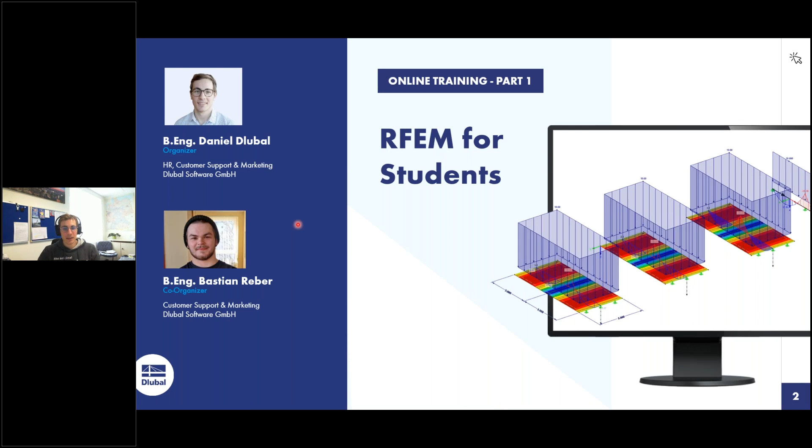Now let's go ahead. For those who are using the GoToWebinar platform for the first time, I would show you the general concept. First of all, if you use the desktop application, it can look like that. Show or hide control panel. When someone can't listen or hear us, just adjust your audio settings, maybe change your speakers, and then you can hear us. And if you have any questions, put that in the box, and Bastian or me will answer it.

So what is the content of today? First of all, I will explain the principal theory of the finite element analysis, or finite element method. Don't be afraid, I don't make any lectures like in the study, just 2 slides of very basic theory of finite element method. Then I will introduce you to RFEM, explaining the general user interface, the general concept, the general functions, where you can find what, and so on.

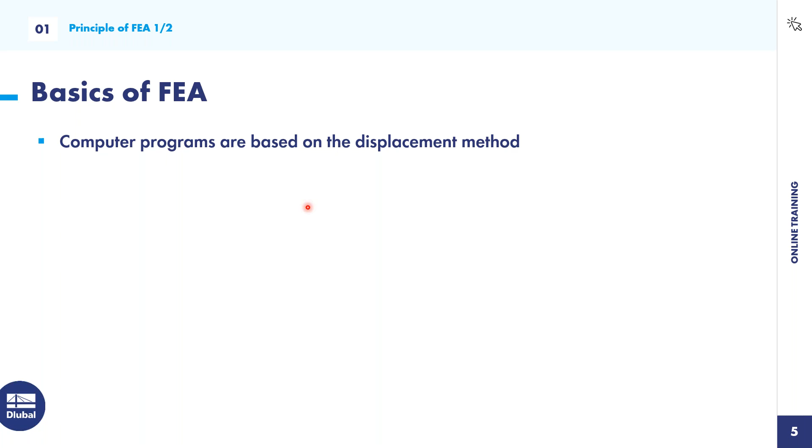But computer programs use the displacement method because it's easier to implement, more convenient, and easier for calculation in the programs. So if you look at any complex structures, it's normal that the analytical solution isn't so easy - it's hardly possible to calculate or find an analytical solution.

This is also the reason why real structures are decomposed into a mesh of finite interconnected elements. At each element continuum and at each node, the properties - especially the degrees of freedom like deformation or restraints - are described at the nodes, so the properties of the element continuum.

Normally the finite element analysis is just a numerical approximation of an exact solution, so the mechanical behavior is described by approximation sets. The whole process of decomposing a structure into finite elements is called discretization - remember that, this is very important. Discretization is the decomposition of structure into finite elements.

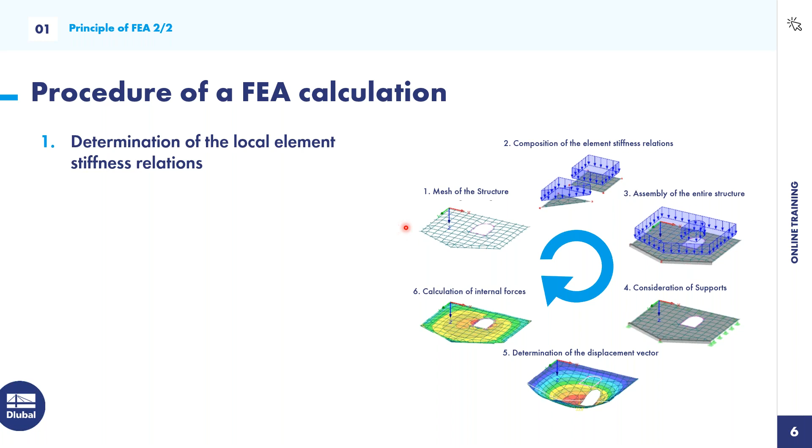So what is the general procedure of an FEA calculation? On the right side you can see this image with the basic steps. First of all, what we do is the discretization - we determine the local stiffness relations, the local element stiffness matrix at each node. So we mesh the structure, we do the discretization. Then we transform it to the global coordinate system and assemble the whole entire structure.

Then we also have to consider different supports in order that the structure is stable. So the boundary conditions are very important to define, and normally the boundary conditions are the support conditions.

And then, as we said before, the displacement method is the method implemented in computer programs. So first we determine the displacement vector, and after that the internal forces like bending moment, shear forces, normal forces, tensions, stresses, strains and so on. This is also called the solution of the equation system, and then we do the determination of support forces and internal forces. So this is the general and very short concept of FEA calculation.

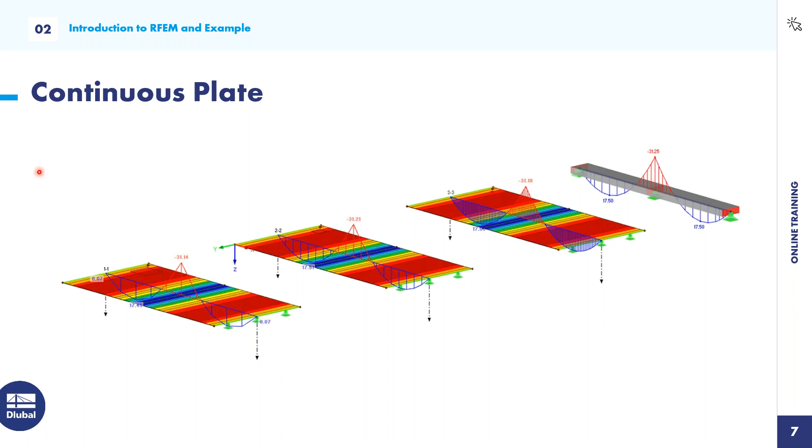So let's start with RFEM. I have also prepared one question for you because I want to know how good your knowledge is in using RFEM.

Okay, most of you have finished this poll, so I will show you the results. Most of you, the participants today, are beginners - perfect. And some others have already some experience in using RFEM, also fine, because for them you can learn maybe some functions you haven't heard about before. So I think for everybody there's something new to learn here in RFEM. Let's go ahead.

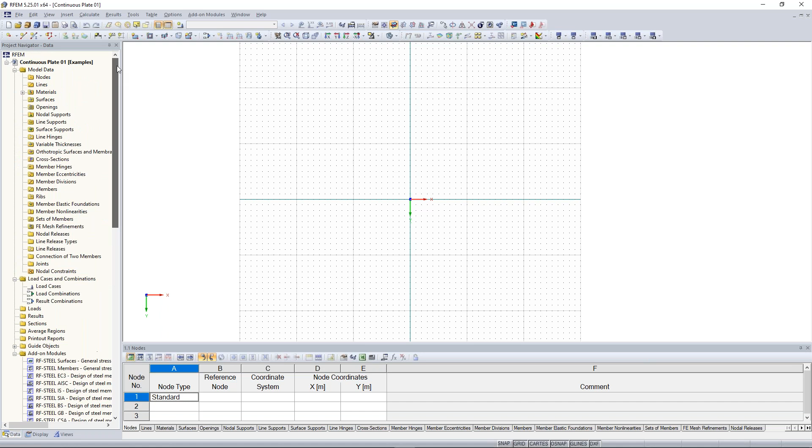Good. So I will explain now the whole user interface of RFEM. You don't have to do it now with me because I will open another project where I can explain the whole user interface using an already existing project. So just watch and remark maybe some information.

So I will open this one. Fine, very good. I will activate here in the status bar the snap and grid function.

So chronologically, the first step is that we have here the menu bar, and here we have the possibility to do almost every kind of workflow function of RFEM. The basic file options: you can save, open, import, export, insert blocks, save it in the project manager, print, and so on. I think this is known from other software applications.

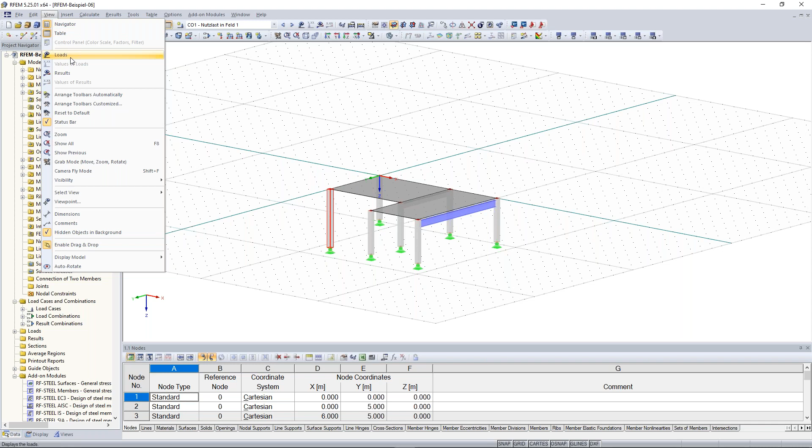Also, you find here additional information concerning the model data, loads, load cases, and combinations. In the view, you can click here on loads, then the loads will appear, or clicking on the results—since we don't have any results at the moment, the program asks me if I want the results, and I click yes. Now I see also the results, and also some other kind of things like comments, dimensions, and so on.

So insert, with this tab you can insert almost every object, from model data to loads and also to load cases and combinations.

The general step in RFEM is that first you model all kinds of necessary objects. You define materials, cross sections, and then you can also model members, hinges, and finally nodal supports. Then you create your load cases and combinations, then your loads, and then you can calculate it. Afterwards you have the possibility to watch the internal forces and the results. This is the basic workflow in RFEM for calculating projects or doing structural analysis.

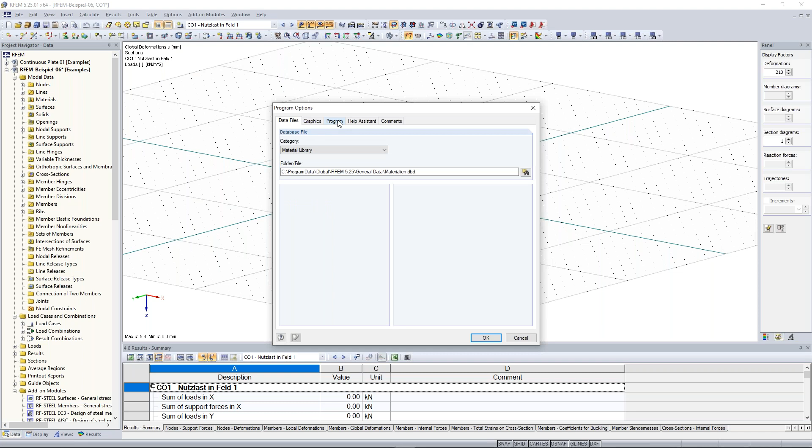The options in the menu bar let you change the language. Especially for those from Italy, France, Spain or similar, we have the possibility to change the language into, I think, 10 or 11 languages. The whole interface will change after you quit and reopen the program, so you restart it. We offer Italian, Polish, French, and other languages like that. You may also see in the background I'm using a white background here.

For those opening RFEM for the first time, you can change your background. In the options, in the configuration manager, you can change the background to black or white. At the moment I use the white background, but when I double click on black background, it changes to black. You can also adjust a green or red background. Just use the display properties or other colors, and you can adapt your background.

I think that's everything for the menu bar. Under the menu bar we find the symbol bar.

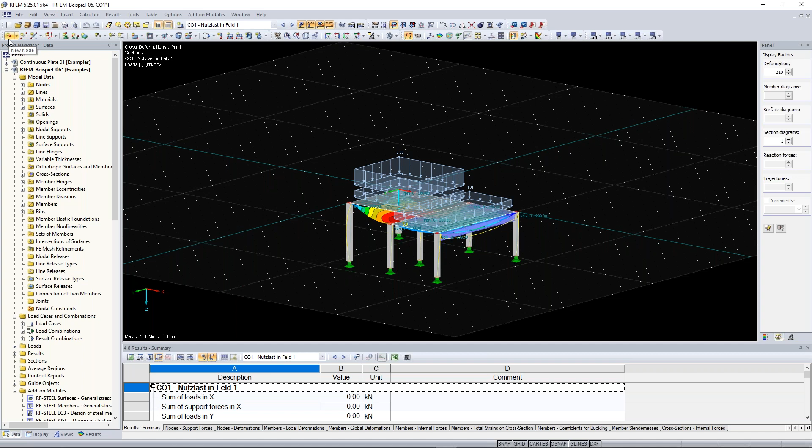The symbols enable a fast way of inserting objects, views, or edits. So if I want to create a new node, I click on new node and click somewhere, and I get a new node. The same goes for lines, for example - I click here and then here. I think this is pretty clear.

Now I will undo it, and I will also change my background again to a white background.

On the left side, you also find the project navigator. It is divided into four registers: data navigator, display navigator, view navigator, and results navigator.

In the first one, the data navigator, you find all kinds of objects, beginning from model data, continuing to the load cases, the loads, results, and so on. You can create new objects, for example by right-clicking on a node and selecting edit node or new node. But of course you can also find all existing objects - when I open this tree structure, I see the already created nodes, like this one.

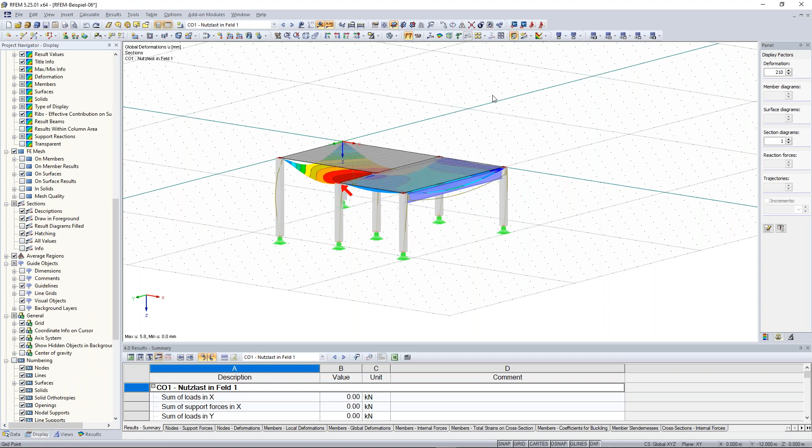You can also hide some kinds of models, like for example the nodal supports - just click on nodal supports, and the supports disappear, but only in visibility. The same applies here with the results and FE mesh - when I don't want to see the FE mesh at the moment, I click on that and it disappears.

So far to the display navigator. Let's continue with the view navigator. So if you like a certain view, for example this one, yeah, quite nice, then you can create a user-defined view. Just click here on create new user-defined view, favorite.

When you rotate it a little bit or move away from the model and want your favorite view again, just click on favorite and it jumps back to your favorite view. This is a big advantage, especially when doing more detailed or complex structures or projects. Then you can use these user-defined views.

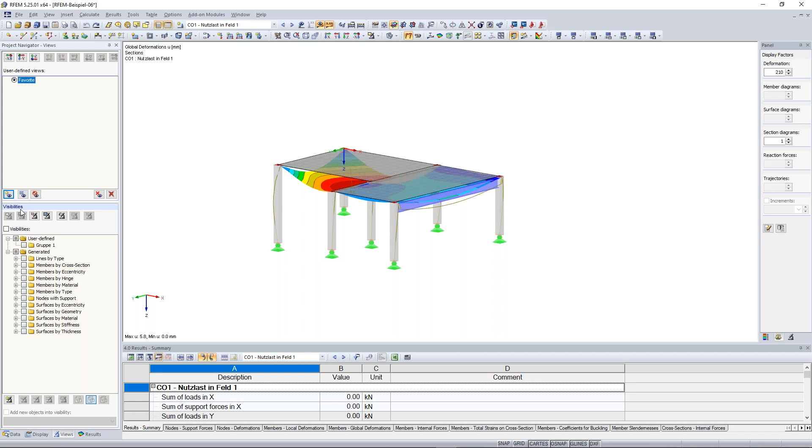Also with the help of visibilities, you can filter some things better. For example, I just want to see all cross sections here of this concrete. No problem. Go to members by cross section, open this tree and activate the rectangle 300 by 300. Only that kind of cross section is visible and also possible to modify.

You can also right click and this menu appears, and then click here on display model, show hidden objects in the background, so the surfaces here will disappear and it will look like that.

To undo this visibility mode, you can click here, visibility by selected objects, click on the arrow, and then cancel visibility mode. You can also do the same thing here.

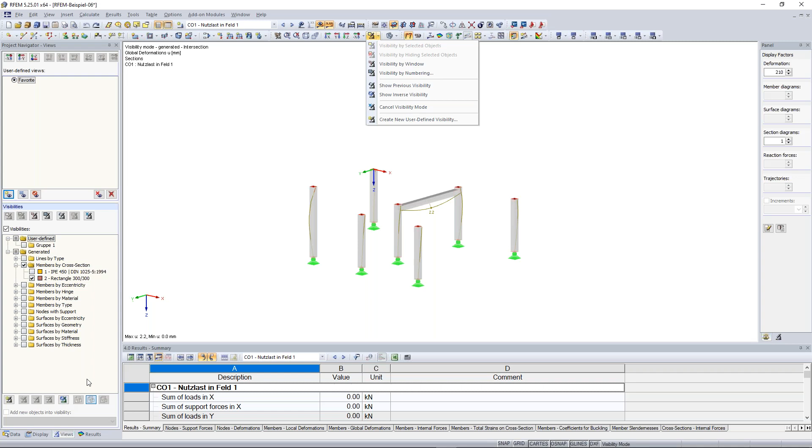Now the last navigator, this is the result navigator. Here I can see results like deformations, stresses, internal forces of members, and also the support reactions. At the moment I see the global deformation of the whole structure, also from the members and from the surfaces.

If I just want to take a look at the members, I click here on members and choose the right internal force. In this case I choose the normal force. And there I can see the compression forces in the concrete columns.

Also here surfaces, internal forces of the surface, mx, my, and so on. And also the support reactions with the components px, py, pz, and so on.

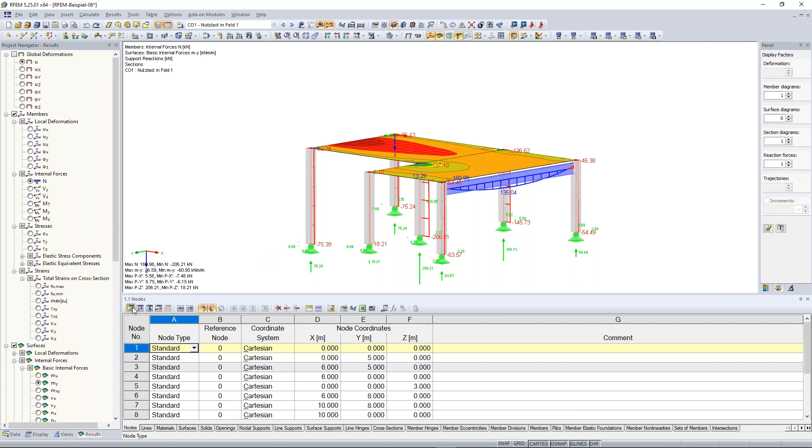So much to the navigator. Now, on the bottom of our user interface, we have also the tables. With the tables, we have the possibility to view all information and also to insert and create new information or objects. For example, I can create here a new node.

So I click here on standard. Reference node is my node here, and I enter the coordinates. I click here, x is 14, y is 0, and z is 3. And I see here this created node.

This is also possible for almost all other kinds of objects like lines, materials, surfaces, solids, and so on. You can jump to the next tables by clicking the next icons. Now I am at the load cases, nodal loads, or also member loads, line loads, surface loads, results, and so on.

Now maybe to the movement of the RFEM model. With the middle mouse wheel, you can move your whole project.

By clicking the left mouse button, you can create a selection window. When you do it from the left corner to the right corner, you select everything which is completely inside this selection window. So in this case it would be the whole right column with the nodal support and also the node on the top.

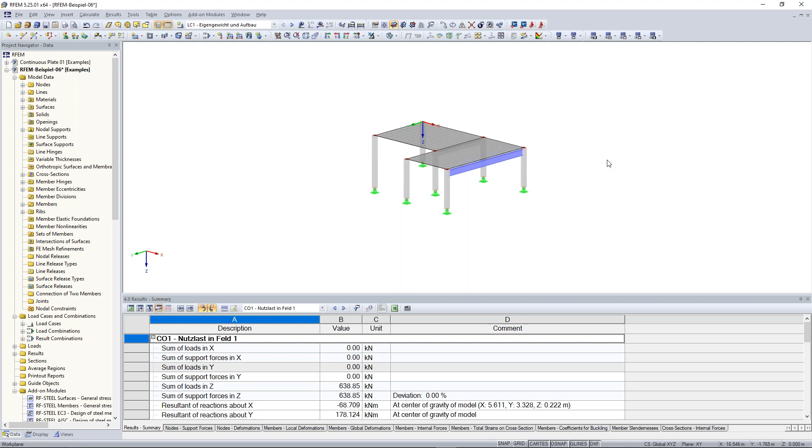And with the mouse wheel you can also zoom in and zoom out, I think this is clear. When you press the control key on your keyboard and also press the mouse wheel, then you can rotate this structure. And when you press the shift key and also the mouse wheel, then you can zoom in, zoom out.

We offer the same possibilities also with this icon here in the icon bar: move, zoom, rotate, and so on. There you have the same possibilities, and so on. Good, I think this was everything.

Bastian, have I forgotten something or do you want to add something? I think you haven't forgotten something, and there are also no questions. So I think you can move on.

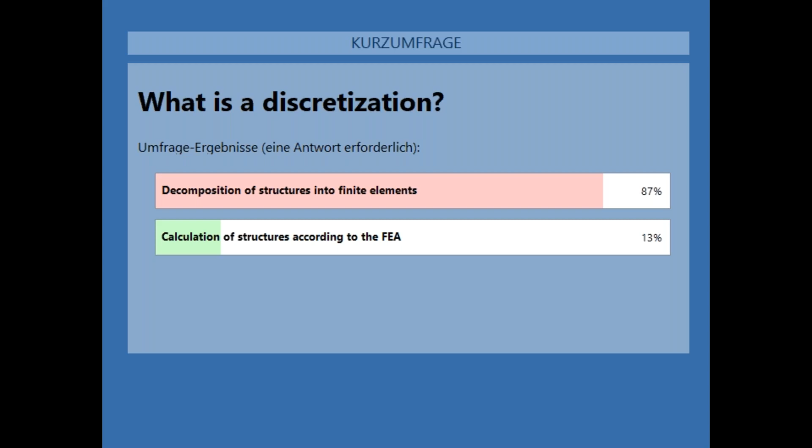Very, very good. So let's start our example. Jump back to the continuous plate, let's start modeling it.

First of all, I create a new surface. In the symbol bar I find this icon, new rectangular surface. By clicking on the arrow, I find also other kinds of surfaces, but for me it's good to use this rectangle one. I click on that, a new window opens, and the next thing I'm going to do is create the material.

In this case I use the Euro concrete C30/37 material. For those who don't have this material here, no problem - edit the material by clicking this icon here, and open the material library.

There I have the possibility to filter different kinds of materials like concrete, metal, timber, and so on, and also the material category itself, like concrete and lightweight concrete, and also define it according to the standard. In this case I choose the Eurocode, because in Germany we use the Eurocode. Maybe when we have some people from Swiss, Chinese, Great Britain, Canada, and so on, there are also some other standards.

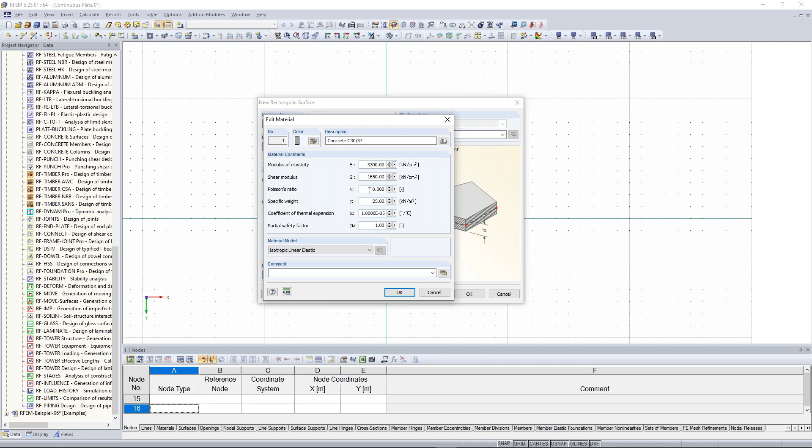I click on OK. Important note is that we set the Poisson's ratio to 0, because we want to get for that example results which should be constant over the whole plate thickness - so no shear deformation in the plate thickness. I click on OK.

And the thickness of our concrete surface is 300 millimeters. So I click on OK.

Now I draw and activate here the snap function. Now I draw this rectangle from my local global coordinate system, 10 meters to the right side and 5 meters high. Good, now right click and I close this way of inserting a new surface. So now I see here the rectangular surface.

And now I can copy it, or I create a new one. Now one tip, please remember this, it helps me a lot: by clicking the enter or return key on your keyboard, you do the same task again. So our task was the creation of this new rectangular surface. When I click the return key or enter key, it will open this new rectangular surface window again, and I click OK again, and I create the same surface again with the same geometry.

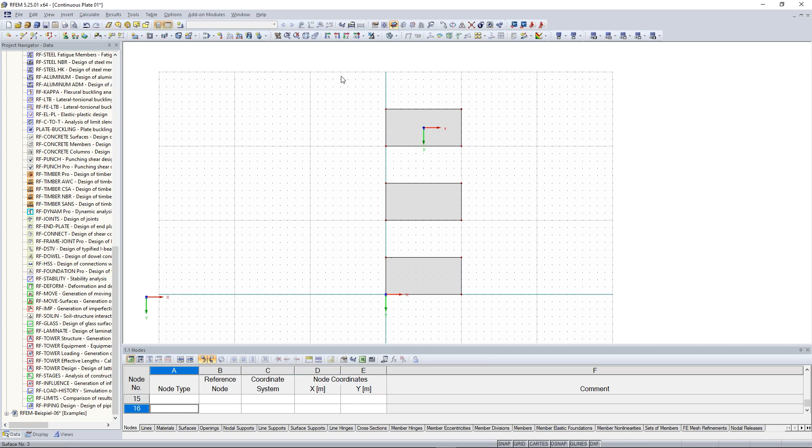And now I do it here again, in a distance of 5 meters from the right upper corner node. So now we move this 10 meters downwards. So I select all 3 plates, snap here in the near of this middle surface, in the near of the left bottom corner, and move this to my global coordinate system.

And I click here the import parametric solid cross section, a rectangle. The width of my cross section is 1000 millimeters, and the height is the same as the thickness of my plate, 300 millimeters. The material is the same, concrete C30/37.

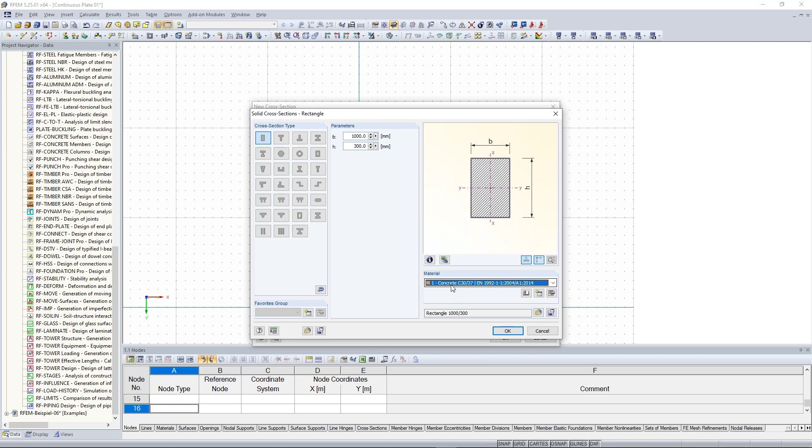I click on OK, and it looks like that. Here I get the cross-section description, also with the cross-section properties, like the moments of inertia, bending, torsion, and so on. I click on OK.

And now the member start has the cross-section of this one, and the member end also has the same. I click on OK. And now I draw it from left to right, also 10 meters long, and close it with a right click.

Good. Now I can rotate it a little bit, and now I can see it from a 3D perspective.

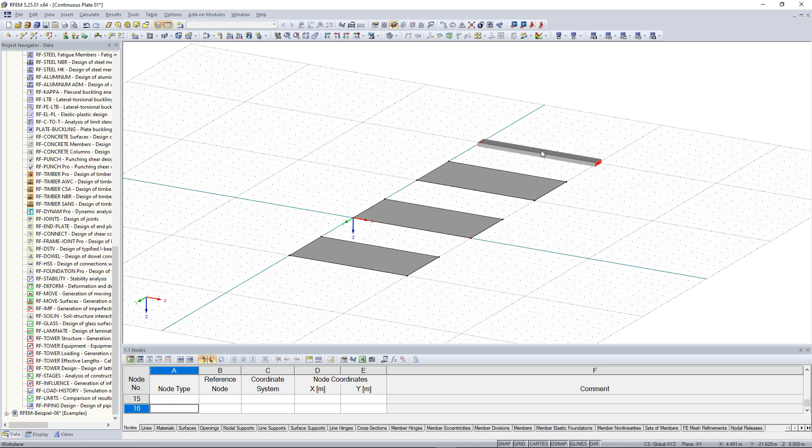So the next thing is we want to have a continuous beam and also continuous plate. Therefore, I have to create lines in the middle and also nodes here in order to create supports afterwards. How can we do that? We can divide this line into 2 lines, and then we get the middle node. Then, with the reference of the middle node, we can create the next line perpendicular to the other end.

So you can also see here the line, the red line, and also the arrow. The arrow shows from the left to the right side, and this symbolizes that the starting node is on the left side and the end node is on the right side.

With a right click on one of the line nodes, I can also show the local axis system, and this is similar to the line direction. So the local x-axis of every line or every member is the same as the line direction. You see it shows to the right, the same direction. And one important note is also that...

Every member has an included line, but not every line has an included member. For this case, for example, I have this member, and here I have included this line. So here I have this member and also the line, but not every line has a member. I think this is clear because here in this case I have this surface, and these lines are just the boundary lines for this surface.

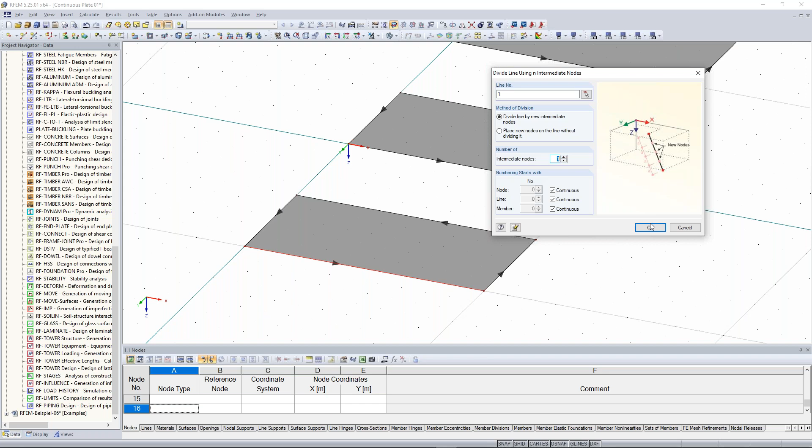So I click here on 1, and I see this node, and these 2 lines are divided. Next thing is that we create this line perpendicular to the next one. So click here on new line and draw this line from there to there. Double right click and we can close this.

Now it comes to my favorite way of creating objects, and this is the copy via drag and drop. We can easily copy this line by drag and drop. Just click on that line, press the Control key on your keyboard, and now the left mouse, click and hold and put it to the other surface. And the same thing we do also for the other one.

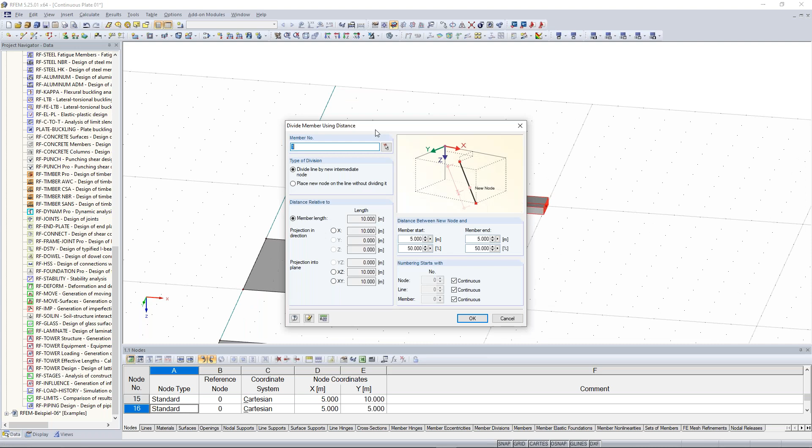Good, now let's divide this member here. Press right click, divide member. Now you can do it by distance or graphically. I decide to do it by distance. And now it's also interesting how we can do that. We want to divide it exactly in the middle, so we can choose here 50% as relation or the absolute value. And it will start from the member start or from the member end.

Now here you can see the arrow, and this arrow shows from the left to the right side. When I want to have a division 3 meters from the start, I have to enter 3 meters, and the member end will be calculated automatically. The same thing with member end: if I want to go from the right side, so from the member end, press 6 meters, the member start will be resulted automatically. But in our case, 50%, because we want to divide it exactly in the middle. I click OK, and we get this new node.

Okay, Bastian, are there any questions? I see some questions in the chat. So should we show something again? What do you think?

I think what you can do is show us again how you can edit the cross section, for example, of the beam, and yeah, guess that would be nice to see again.

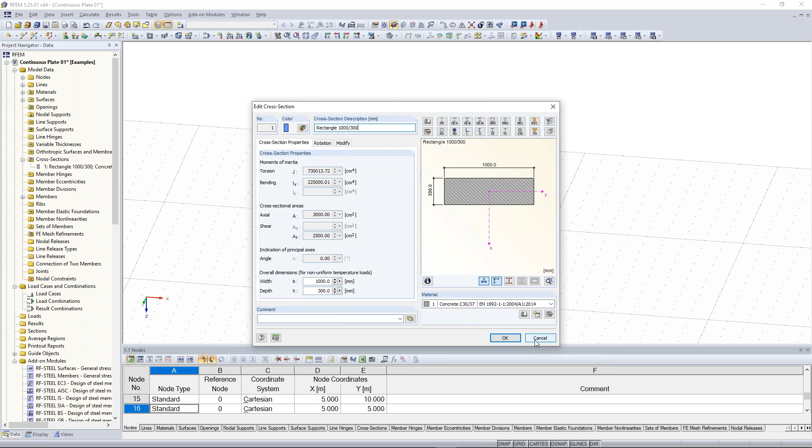This is one way of doing this. Or you choose the whole member by selecting it, right click, member, and edit. Then you can modify your member by editing the cross section for the member start, or create a new one. It's the same procedure as with the data navigator.

Good, I would continue. Now let's do some supports. It's very easy. We have line supports for surfaces and lines, and also nodal supports like for this kind of members. So we create line supports. We choose this hinged support, click OK.

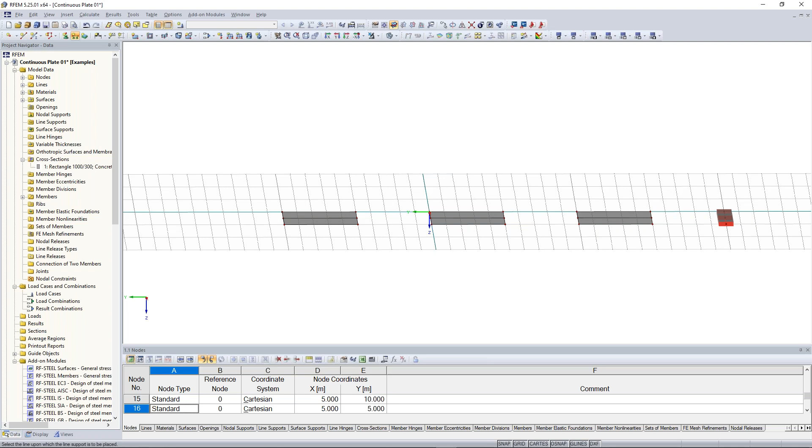Now I draw, and this is the big advantage of RFEM: I can choose and select several objects at once. So I rotate my interface a little bit, and now I draw a selection window from the right to the left side in order to get all three middle lines here. I do the same thing with the other surfaces.

Good, now let's come to the member. Here we do two different kinds of nodal supports. The first one is a new type of nodal support, so I click on new type of nodal support. Now let's look at this definition of support conditions.

So if I activate or check one condition, like UZ, then I deactivate the deformation of UZ, so no deformation in this direction is possible. Therefore there will be some forces, and the same also with restraints.

So the same also with, now I have to look it up, this word, for twisting and also for moments. In order to prevent torsion or the twisting of my member, I also have to activate the restraint phi x. This will prevent torsion around the x-axis.

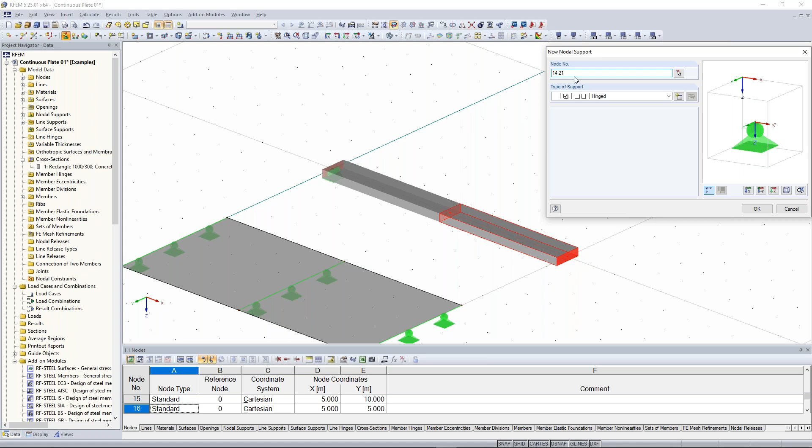Click here on New Nodal Support, and now we can choose the normal hinged support. Because we have already selected the nodes, they appear here also in this box. Click on OK, and the two supports were created. Okay, good.

Now the next step is the creation of loads. Before we add loads, we have to create load cases. Click on New Load Case in the symbol bar, or here under load cases, combinations, New Load Case. Same procedure - as you can see, we have more possibilities to insert or create something. So, New Load Case. For our simple example, we insert the name or description 'test load'.

And deactivate the self-weight, in order to compare the results better. Then I click on OK.

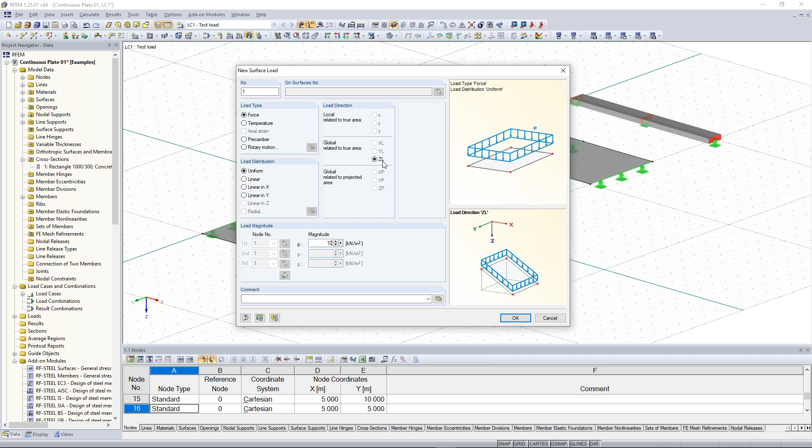I will create surface loads and member loads. So again, new surface load here in the symbol bar. Here I can set up load types, load direction, uniform distribution, linear in X, linear in Y, and so on. I add the magnitude of 10 kilonewton per square meter. Maybe the load direction is closed or greyed out, so greyed, because we use model type 2D, so there we have some restrictions concerning the load direction.

I click on OK, and I add the loads on the surfaces. Good, and now let's do the same for the continuous member. One big mistake, especially for RFEM beginners, is to use line loads for members, but we have to use member loads for members.

Line loads are used for additional loads on lines. So when I have, now I have to look up the word, a railing or handrail on this line, and I want to add some loads, then I can use the line load. Or when I want to consider wind loads at lines, then I can use line loads. But when I really want to load members, I have to use the member load. Please keep that in mind.

For members I use member loads. So I click on member loads, enter the same load parameter, 10 kilonewton per meter, click on OK, and I choose both members.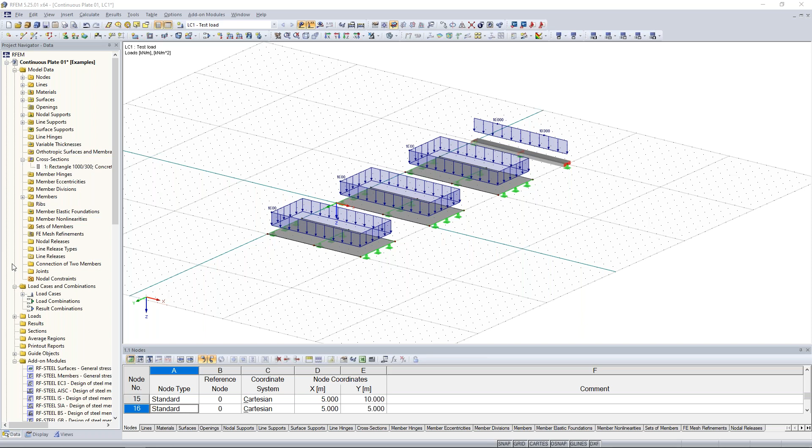Nice. So the next part is the creation of the refinement, so every surface gets a different mesh size. In order to do that, I create here FE mesh refinements. Normally, the whole settings of the FE meshes are managed here at the Calculate tab under FE mesh settings.

Here you set the general target length of the finite elements. So if I would do nothing, every surface would get a finite element length of 0.5 meter. But in this case, I want to have for every surface another one.

So I do here FE mesh refinement, right click, new FE mesh refinement. I choose here at first surface, target FE length 1 meter, so we get 1 meter big meshes. And now I have to choose the surface, and in this case, I choose the first surface. I click on OK, and click on OK again.

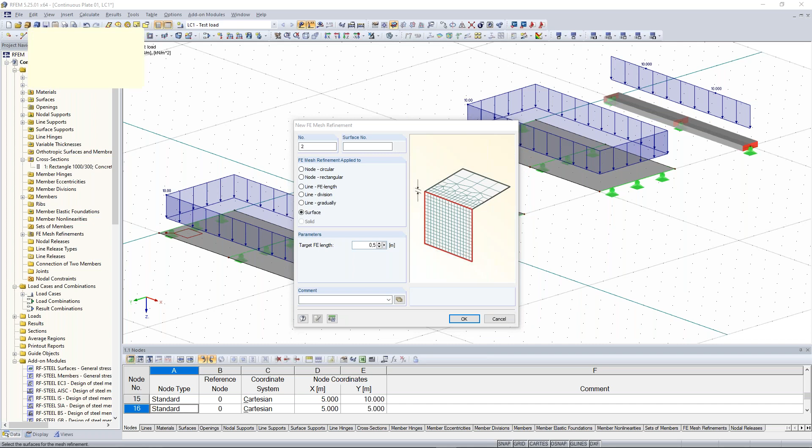Now let's do the same thing again. Right click here in the data navigator, new FE mesh refinement, 0.5 here at the target FE length. And the surface is this one. I click on OK, on OK again.

And now here we do a different way of insert. Right click, FE mesh refinement, new. Because we have already selected it, it shows me here that we have this third surface. We create a new FE mesh refinement, 0.1. Here we see the FE mesh refinement with this quadratic object symbol.

And now I would suppose that we calculate it. Before we do it, and in order to compare the results better to each other, it would be quite helpful if we have sections here at the surfaces. In order to do that, here in the data navigator, we have also the possibility to create sections.

Just right click, new section. The section name is 1-1 or something like that. You can also do A, or whatever, it's up to you. The sectional surface, so the projection direction is here, the global z-axis. I think local and plus z is okay, but please only on surface 1.

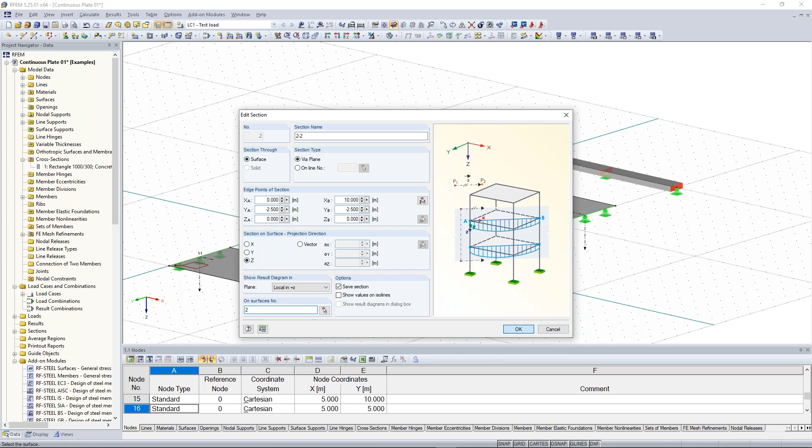So, modify or edit here the section name and choose here the correct surface. And let's do this thing again. Choose here also the correct surface and click on OK.

Good, now I think we have everything we need for our calculation. The next thing is starting the calculation. Therefore, you can use here calculate all in the symbol bar, or also calculate RFEM results only, or just calculate, and there you can choose your load case or your load combinations and so on.

The topic of defining load combinations and so on will be part of the next chapters, the next parts of our student series of online training. So I click here on calculate all.

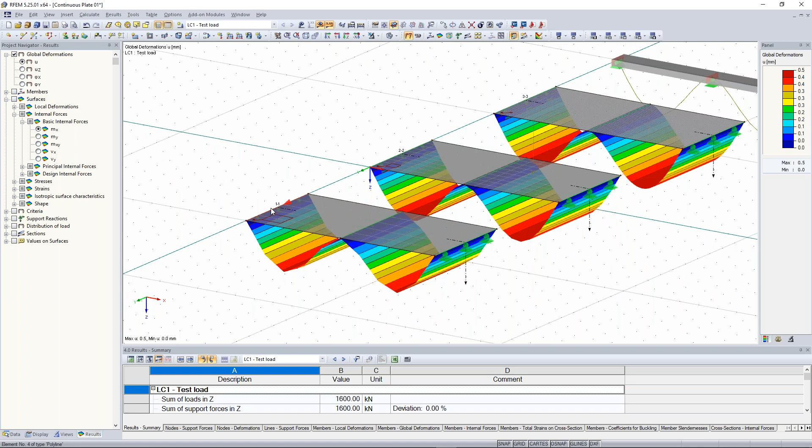And the first thing we're going to see are the deformations. So here the deformation, and also a very nice thing is when I change here the display model to the wireframe display model, I see here also the size of the FE meshes. And as we said before, here in this first surface, we have an FE mesh size of 1 meter, 0.5, and 0.1.

Good. In order to see the results here at the beam, we have to activate members, and we see here the bending moments: field moment, support moment, also the shear forces and so on. But I think this is clear. More interesting are maybe the sections of the surfaces in order to see the bending moments of the surfaces.

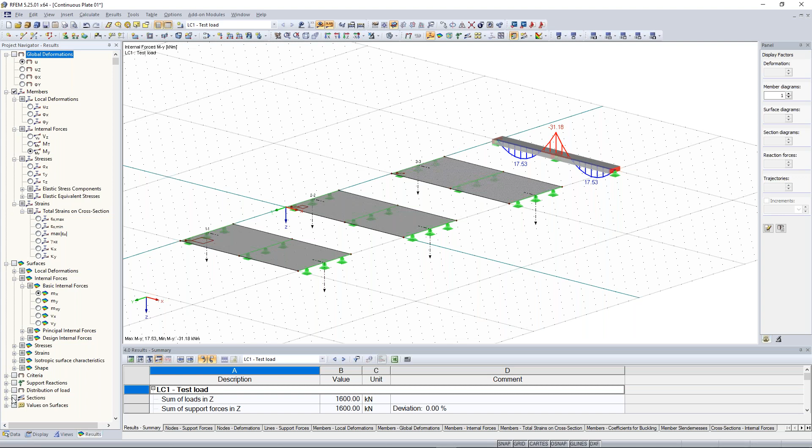Therefore, I activate here in the result navigator sections, and I want to see the bending moments. So I have to activate here surfaces and choose here MX. So one hint to the basic internal forces of these surfaces.

You can see here also the local axis of every surface. At the moment, I deactivate the results just to see what I want to explain you. Here we see the local axis of this surface, the x-axis and the y-axis. The x-axis shows to the global x-axis, and the local y-axis also to the global y-axis.

So now, important point, the basic internal forces like mx and my, they are located in the same direction like here. So mx is along the local x-axis of this surface, and the same for my.

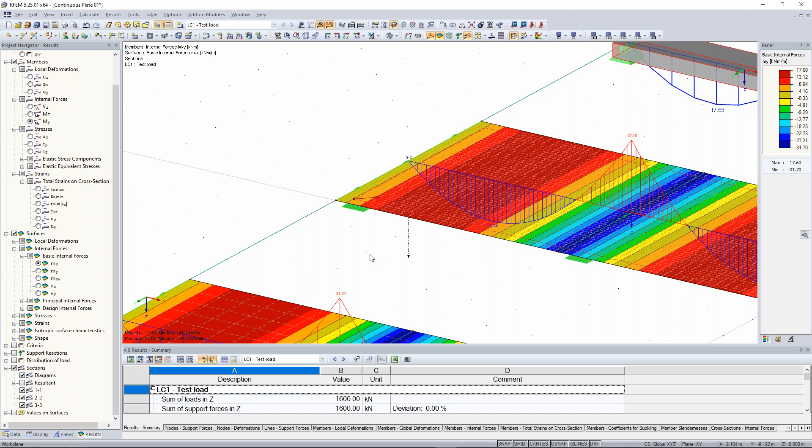Here you see it's linear, and normally it's everywhere linear, but here we have in 1 meter just one FE element, and here we have 10 FE elements in 1 meter. So the approximation of the results will be here very incorrect, I would say, or not really exact, and here it's more exact. You see it here at the distribution of the moment section, and it isn't really exact in comparison to that one where we have really fine FE mesh sizes.

So keep that in mind. The extreme results can be correct almost, but the results between those extreme results can be, at the more rough finite element, not so good - like in one FE element, this is what is really fine. Because when you compare maybe the two sections together, result diagrams...

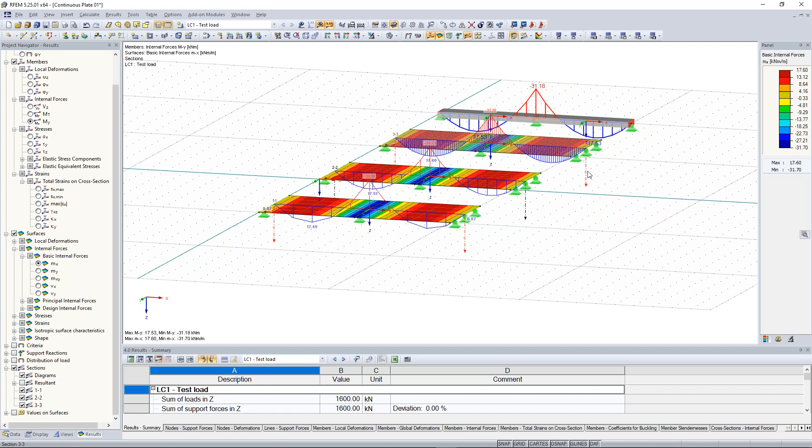And I watch here this one. So the first section we have here basically somewhere at 0.57 kilonewton meter, and here also almost 0.8. So this is a difference, and this is something to remind. So you have to know it.

I would suggest you make that FE mesh quite fine, but not too fine, because when you have too fine FE meshes, then the calculation will take very long. So you have to find the right proportion, the right FE mesh sizes, in order to have correct and exact values, but also consider the long calculation time of FE programs.

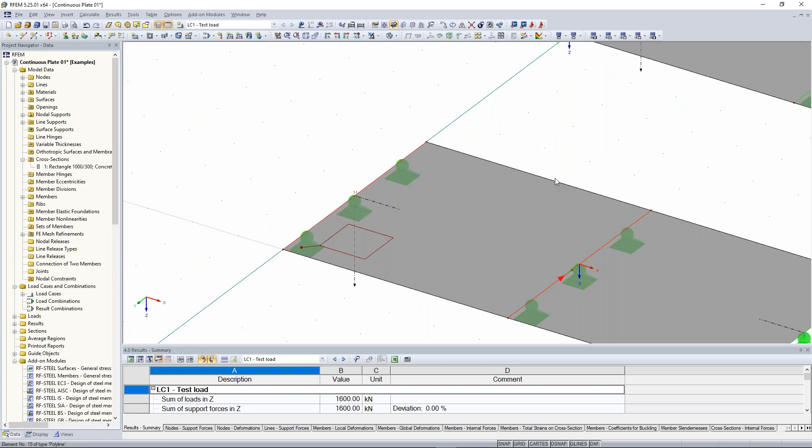Now I see one question, and this question is: what is the suggested FE mesh size? I would recommend you to have at least 4 up to 6 or 8 FE meshes in one surface. So we have here from there to there, it's 5 meters, so at least there should be from one boundary condition to the other boundary condition, at least 5 up to 6 meshes, finite elements. So I would say this one is quite good.

This one with the mesh size 0.5 meters - this one is very fine, and it is not so important to have so fine an FE mesh.

And another question I see: are there any shortcuts for show or hide loads? No, unfortunately not, there are no shortcuts for that kind of thing. But maybe Bastian, you could find other shortcuts for other types of functions - this would be good if you could post it as an answer for that question.

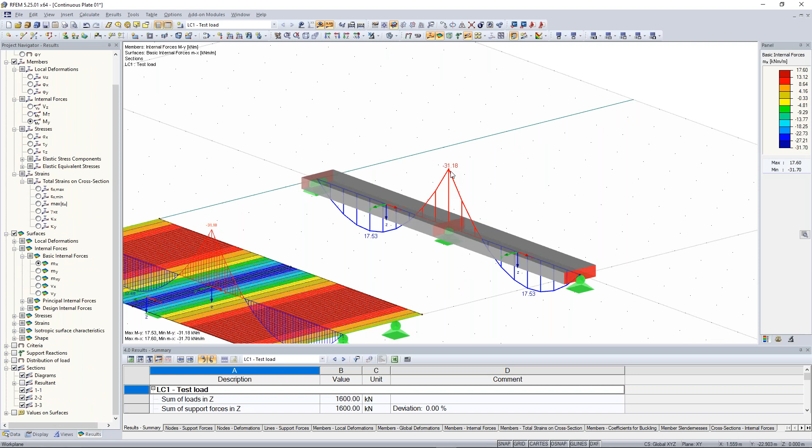Normally in the study, you do some hand calculations. That's pretty common, and you use tables or calculators. When you calculate the support moment of a two-field beam or continuous beam, you might get different values. Let's watch the results again. Normally you would get a support moment of 31.25 kilonewton meters, but in this case, just 31.18.

Why? It's due to the shear activation of members. So I go here to calculation parameters, and here you see the activation of shear stiffness of members. If I activate it, it considers additional shear forces and therefore also additional deformation, and you calculate it as not as stiff. In Germany, you would say schubweich. So with the activation of these cross-sectional areas AY and AZ, additional areas of cross-section.

This will be very interesting for the next chapter, because I have also prepared a PowerPoint for that. So I jump back to my PowerPoint.

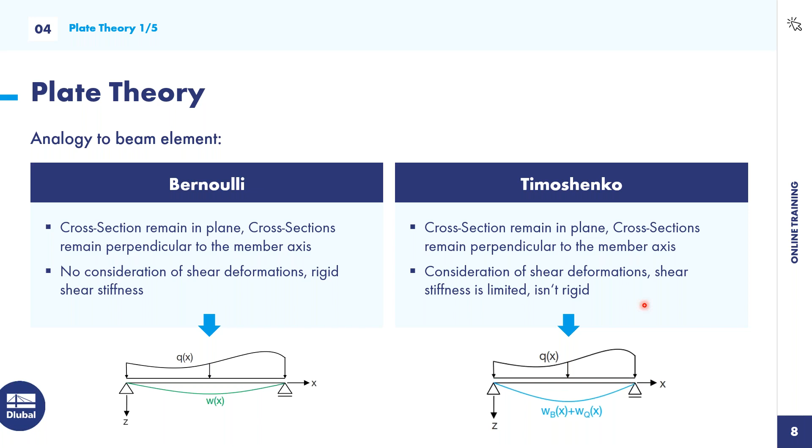But what is in most cases implemented in FEA programs is the Timoshenko beam, or the plate theory. First let's look at the Timoshenko beam. The first condition is the same: the cross-section remains in plane and perpendicular to the member axis. But what we consider here is shear deformations, so the shear stiffness is limited and not rigid anymore. Here it remains perpendicular to that axis, and here we get an additional angle, so it won't be perpendicular anymore to the member axis. So additional deformation in this Timoshenko theory.

Now let's transfer the beam theory to the plate theory. The Bernoulli beam is, in plate theory, the Kirchhoff theory, and the Timoshenko beam is the Reissner-Mindlin theory. What are the conditions? We have a geometrically linear system, so small deformation, Hooke's law, cross-section remains flat with no warping, and constant thickness, and we don't consider any shear deformations. In Reissner-Mindlin, the first four are the same, but we consider shear deformations and also the transverse and lateral strain. What is that last one, the transverse or lateral strain?

When I have this kind of beam and I try to tie this beam with a force, it will get a little bit longer. That part where it gets longer is called delta L. Also the cross section becomes a little bit smaller. This effect is called the transverse or lateral strain. In German, we would say Querdehnungseffekt.

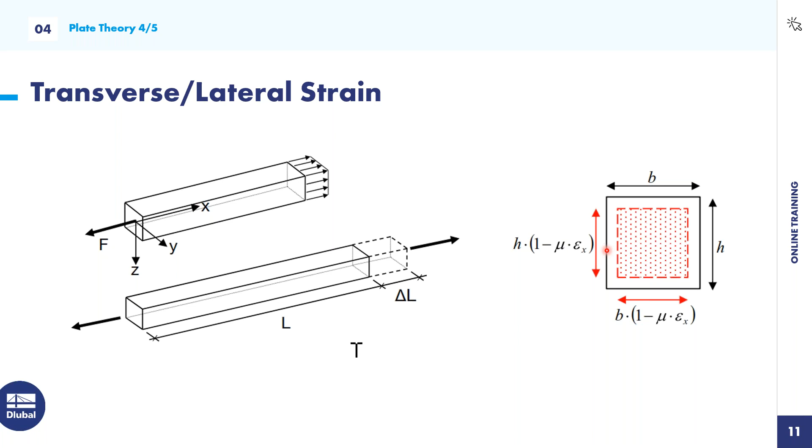We can use Kirchhoff for the theory of thin plates, so normal concrete surfaces like in story buildings, where we can get quite good results with the Kirchhoff theory. It's a simplified approach. The Reissner-Mindlin theory considers shear deformation, and we can use it for thick plates as well as thin plates. When you calculate according to Reissner-Mindlin, you get quite good results for both thin and thick plates, because it's a higher-order approach and we get more accurate shear forces. My recommendation is to use Reissner-Mindlin, because then you get quite good results for almost every application area. When you use Kirchhoff for very thick plates, like plates with a thickness of 2 or 3 meters, like foundations, the results won't be so correct.

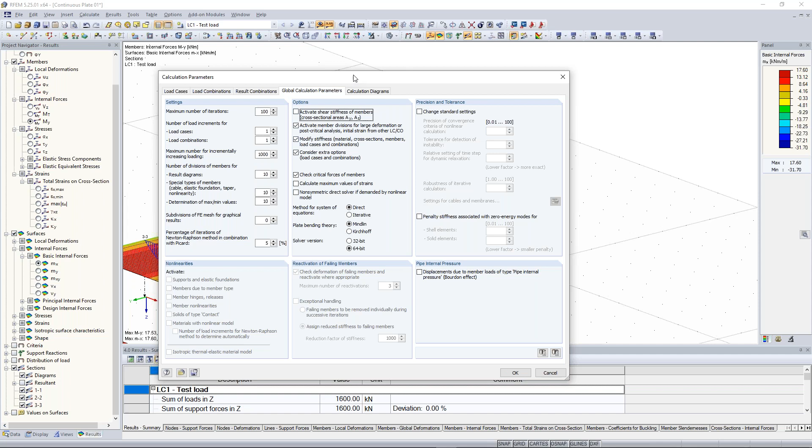Now let's jump back to RFEM and see what happens when I change the calculation parameters — the activation of shear stiffness of members. I deactivate it, so now I calculate according to the Bernoulli beam, with no shear deformation. I recalculate it, and I get the support moment of my two-field beam of 31.25. This will also be the same when calculated according to tables, or by the force method, or by hand. So keep that in mind.

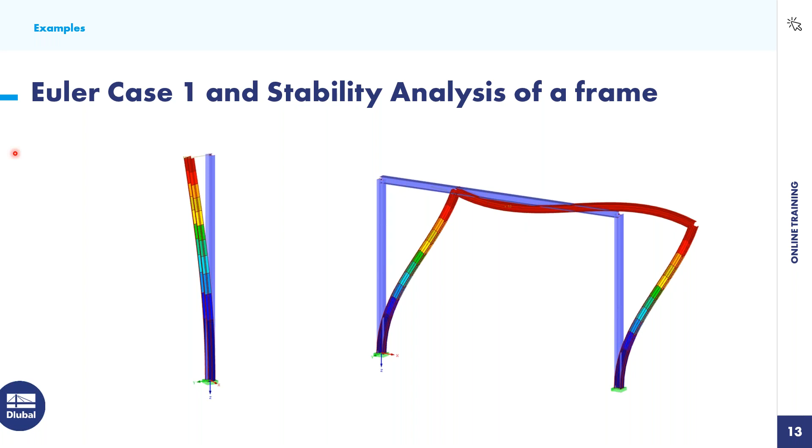I create a new file, a new model here in RFEM. In this case, I insert here Euler Case 1, save it under downloads. Very important now, I want to consider a 3D model, because we do a stability analysis of this Euler beam, and there I want to consider both buckling directions. So therefore 3D, I click on OK.

What we're gonna do now is creating this column. Click here on New Single Member, then click on Create New Cross Section for Member Start. We choose here a steel profile, what is very common in Germany: HEB 300. I click here on Import Rolled Cross Section HEB, or you can also import the cross section from the library. Click here on I sections, and choose here this HEB.

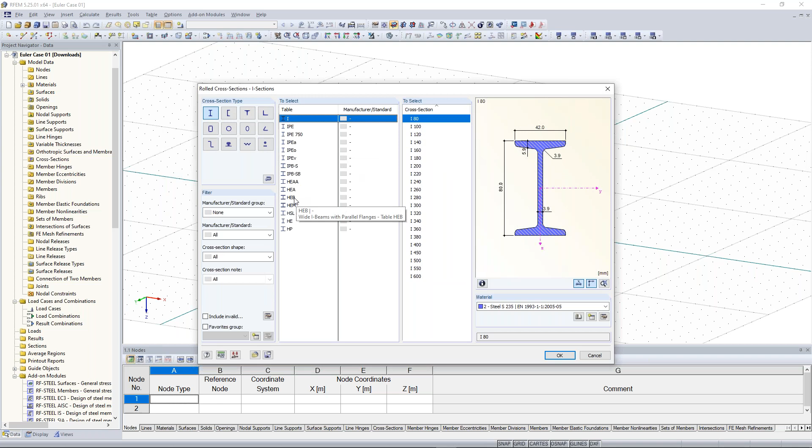So what are HEBs? These are wide I-beams with parallel flanges. We choose here this HEB 300. Material is steel S235. We can also edit this material. I choose here this steel material according to the Eurocode. You can also import some material from the material library. Steel S235, because of this yield strength of 23.5 kilonewton per square centimeter. I click on OK.

Now I want to create this column, and this is also maybe one of the mistakes: when I want to create a column and I'm not in the correct work plane, I can't model it into the height. Yeah, it doesn't work because I am here in this work plane.

Two possibilities: I change the work plane, for example in XZ, and then I draw it 10 meters high. Or if I want to stay in the same work plane like before in the XY, I have also the possibility to create this beam with the help of length and direction. I say, perpendicular to the work plane, 10 meters high, and opposite of the global Z direction, and I get the same result as the left beam.

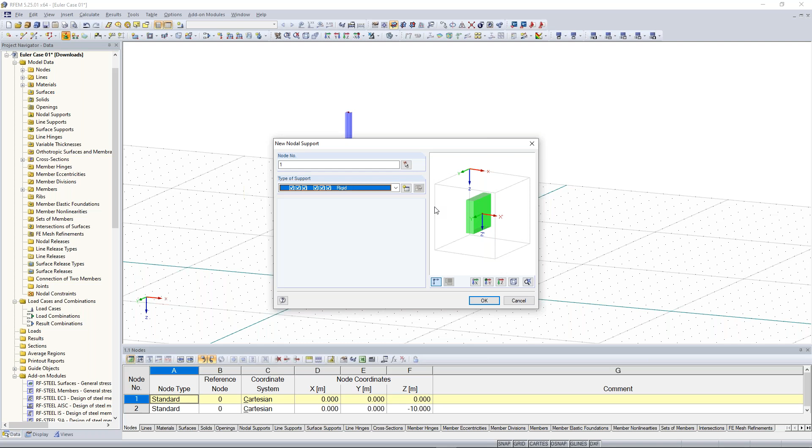This is one tip. I delete the right column, and now I will add here this support, a nodal support. In this case, we have a rigid support, so the whole node is fixed in every direction. So there will be horizontal and vertical forces and also bending moments around all axes that can be transferred into this nodal support.

Good, now this was everything concerning the creation of the model. Now we create a new load case again. Load case will be test load, and we don't consider the self weight again. I click on OK.

Now we create a new nodal force, on that node here. Therefore, we click here on New Nodal Load, which you find at the symbol bar. This nodal load refers to the global coordinate system. I put here a horizontal force in the global x direction of 10 kilonewton, and a vertical force of 100 kilonewton. I click on OK and select the head node here.

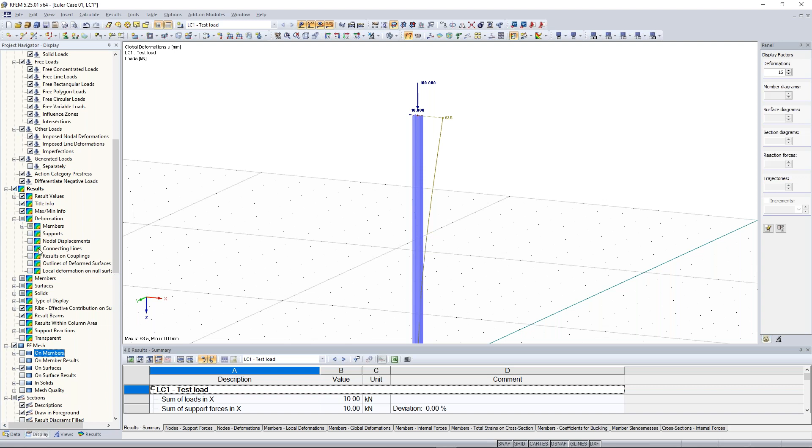Therefore, we go to the display navigator, scroll to the chapter results, and jump to the chapter deformation, members, and I want the cross sections to be colored. I click here and we see the cross section colored, also the deformation of the member. I think the deformation is pretty clear: we have here this horizontal deformation mainly, maybe also a little bit pressed. Okay, good.

Now, also interesting is the calculation theories. Maybe the calculation according to the first theory of order, then also the second theory of order, and so on, all the P-delta. When I do the calculation of load cases, I build the equilibrium of the system at an undeformed system. The second theory of order calculates the equilibrium at a deformed system, and there can be differences, especially when talking about internal forces like the bending moment. I want to show you these differences.

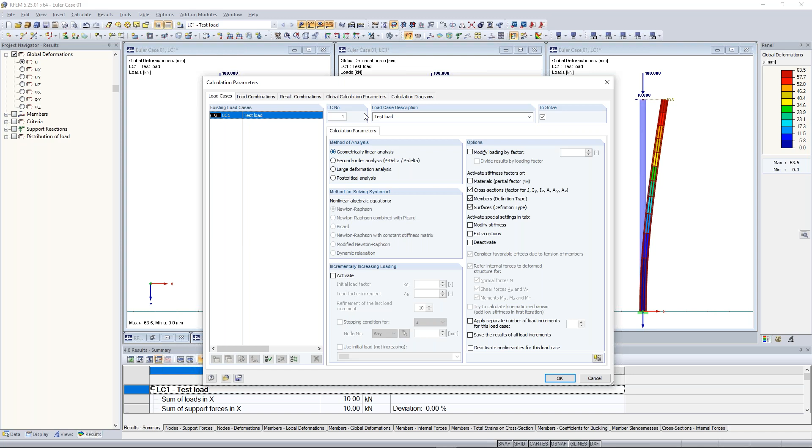So what we're going to do now is go to Calculate in the menu bar, then go to the calculation parameters, and go to the register Load Cases. There we have our load case, test load. Normally, load cases in RFEM are preset with the theory of first order, so we have a geometrically linear analysis.

Now we're going to do a nonlinear geometrical analysis, so we choose the second order analysis, P-delta. I think especially the American guys know this as P-delta. I click here on second order, and I calculate it. So let's calculate it.

Maybe you also see the deformation here - they are a little bit different, but this is not the main point. I take a look at the bending moment, especially at the bottom. There we have 106.87 kilonewton meters. Normally we have a length of 10 meters, a horizontal force of 10 kilonewton, 10 multiplied by the lever arm of 10 meters.

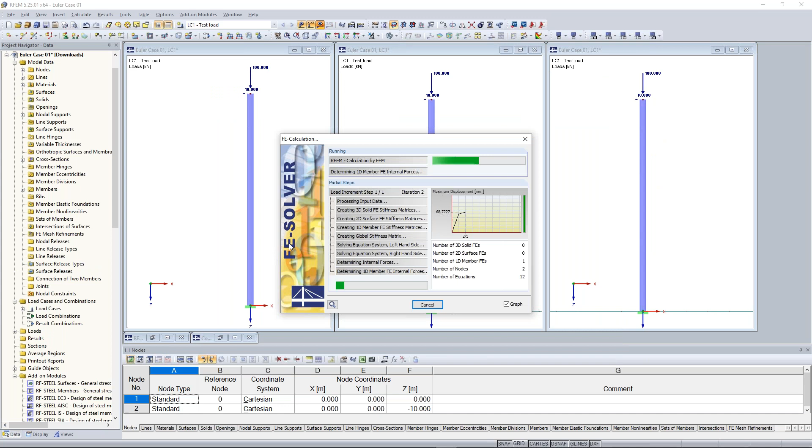Is 100 kilonewton meters at the bottom as the internal bending moment. So you don't have to do it again, I will show you the internal forces again at the analysis of a geometrical linear analysis, so theory first order. Here 100 kilonewton meters. Now again with theory second order, and now we get an additional 6 kilonewton meters.

Where does it come from? As I said, the geometrical nonlinear analysis, according to the theory of second order, calculates the equilibrium at the deformed system. Now let's take a look at the deformed system.

The horizontal deformation here at the head node is 68.7 millimeters. Now when you multiply it with the vertical force of 100 kilonewton, you will get an additional bending moment of 6.87 kilonewton meters. This results in an overall bending moment of 106.87 kilonewton meters.

So 10 kilonewton multiplied by the lever arm of 10 meters is 100, plus the additional amount due to the deformed system. 100 times 68.7 millimeters equals 6.87, and as a sum we get 106.87 kilonewton meters. So far to the different calculation methods.

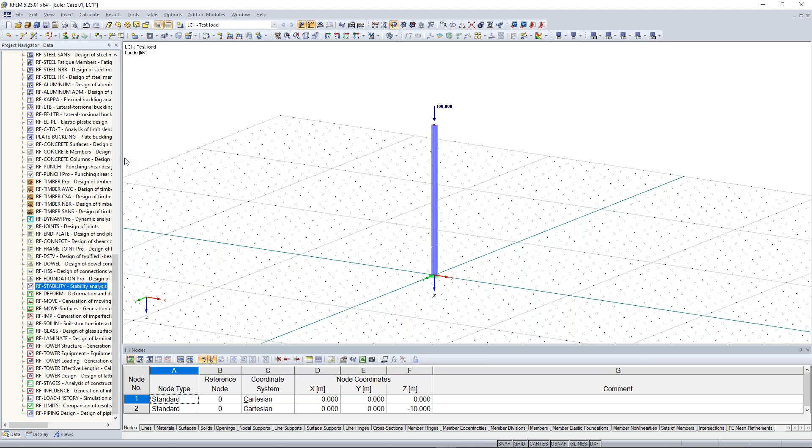You find RF-Stability here in the data navigator. Scroll down, here you will find it, RF-Stability. Or you find this also here in the menu bar, under Add-on Modules, Stability, RF-Stability. So this new window will open, and here's what you can do with RF-Stability.

With RF-Stability, you can do any stability analysis by the eigenvalue method. So you can calculate eigenforms, buckling forms. You can get the critical lengths, critical forces, critical loads, and so on. This is very good in order to detect maybe some weaknesses of your structure, or to detect some critical points and so on.

Therefore, it's very good. And now let's do the typical Euler case number 1. In your studies, I think you have already learned how the first eigenform or the critical buckling of Euler case 1 looks like. Let's do the same here in RF-Stability. So first of all, number of lowest eigenvalues.

In this case, Euler case 1, there are only 2 cases important, so I choose 2. We have the buckling around the weak axis and the buckling around the strong axis. We choose the load case 1. We don't need to consider favorable effects due to tension, and also no free stress for cables and membranes. But I would activate the division of straight members and set the minimum number of member divisions to 10.

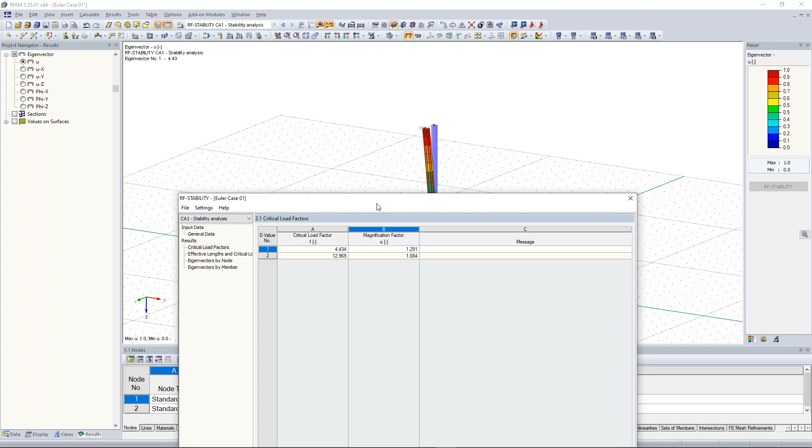So let's watch the eigenforms graphics. The first eigenform of this column is the buckling around the weak axis. You can see it here. The weak axis is the z-axis. So around the weak z-axis, my system is buckling - this is the first eigenform.

Now the next eigenform is around the y-axis, because the y-axis is the much stronger axis. I think this is pretty clear. And therefore, because the strong y-axis can resist more loads, the critical load factor is higher, and also the critical load is higher.

Good. Now let's see what happens when I increase the load of 100 kilonewton to 443, so still under my critical load.

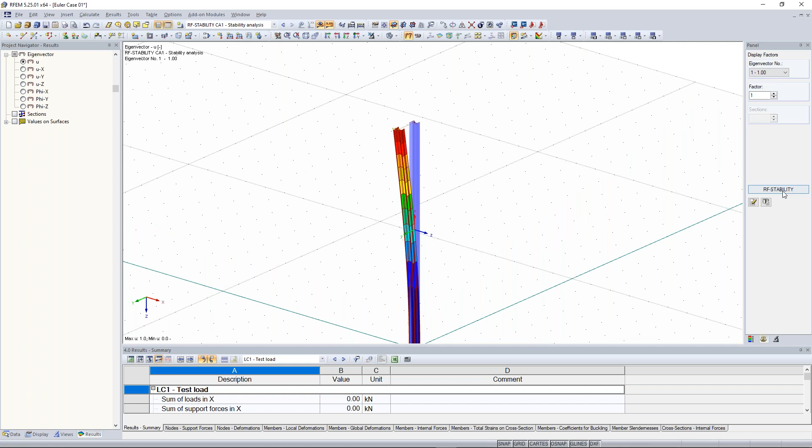This means that the system, with that load of 443 kilonewton, is almost unstable. Now let's see what happens when I increase the load to more than 443, to 444.

Now we get the result, and then a calculation error: the stiffness matrix is singular, the model is unstable. And this is the reason - the model is unstable because of that too high load.

So in this case, my system is unstable, the stiffness matrix is singular.

For that, we have a very good FAQ. Bastia, maybe you could put the FAQ in the chat, and this FAQ will help you find maybe also the problems or the critical locations why your model is unstable, especially at the beginning of modeling with RFEM. It can be possible that you find these problems.

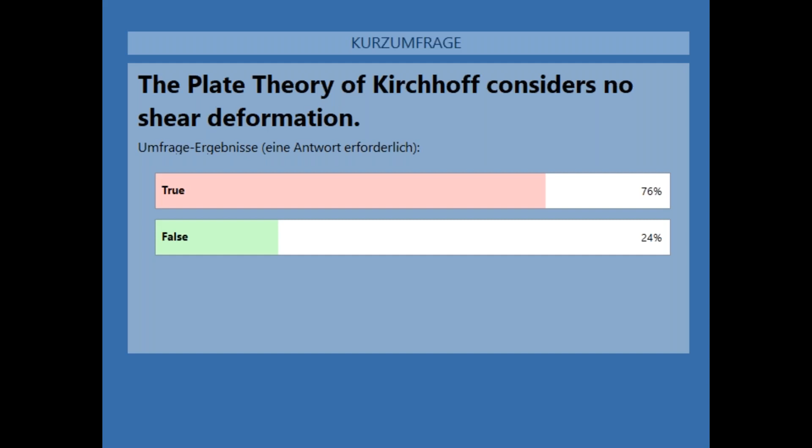So the correct answer is the first one. The plate theory of Kirchhoff considers no shear deformation, so that's correct. And now I have also prepared another question concerning the critical load factor.

Okay, let's close this poll again. I'll show you the correct answer, and most of you have chosen correctly. So again, the critical load factor says by which factor I have to multiply the load in order to get this system unstable, or until the structural system fails. Good.

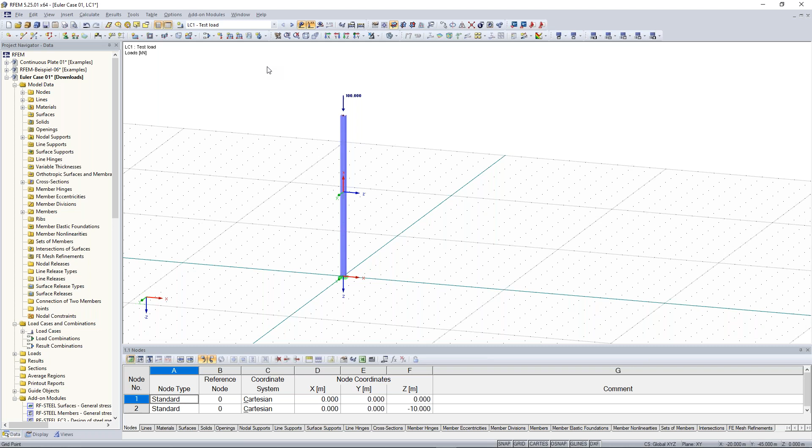Therefore, I change here the nodal force to 100 kilonewton back. And a big advantage now in RFEM is that we can easily copy something. I select the whole column, right click, and say move and copy. Now, it's important when I want to copy something that I put here a number higher than 0. And the displacement vector is 10 meters. I can put here 10 meters as a number, or I can also select two points in order to get the displacement vector. In this case, I choose here this length and this length. It's the same.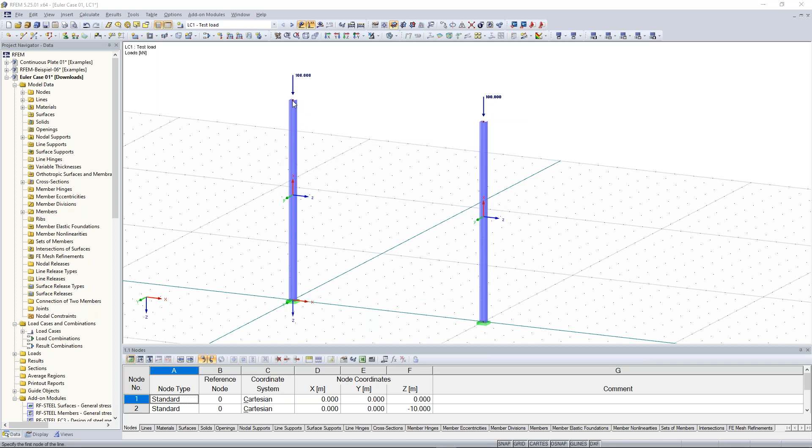Good. Now I need here a girder for the frame, and therefore I create a new cross section. In this case, also a new single member. I click here in the symbol bar, new single member, and I create a new cross section for the member start. In this case, I choose the IPE 300 profile. I can also enter this in the cross section description. Material remains steel. Click on OK and draw it from the left column to the right column.

Okay, good. Now I want to change the height of this frame. Therefore, I select both nodes, right click on the member -- doesn't matter, member or nodes -- and then I can choose here the nodes and say, okay, I want to edit it. And because they have the same coordinates, I can modify here the Z axis, so the Z coordinate. And I choose here -6.

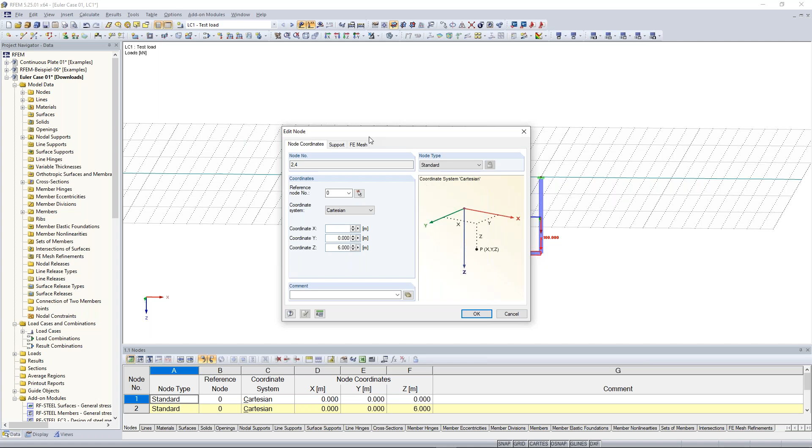So what was the mistake? The mistake was that I also deleted the minus, and now the system was oriented according to the global Z axis, and my global Z axis is located downwards. Therefore, also the coordinate Z plus 6 goes in this direction. But I want it like that, -6. No problem, you can change it afterwards very easily.

Good. Now, the same thing again, let's do the stability analysis. Therefore, click here on RF Stability again. And now we show a little bit more eigenvalues, 6 for example. Calculate it.

And now let's watch the eigenvectors. We can see that we have a deformation out of the plane. Normally this isn't so good for frame structures or for steel halls, and we try to prevent these situations. Jump to the next eigenvector. Here the same -- we have deformation out of the plane, so the eigenform shows out of the plane globally, so the whole system.

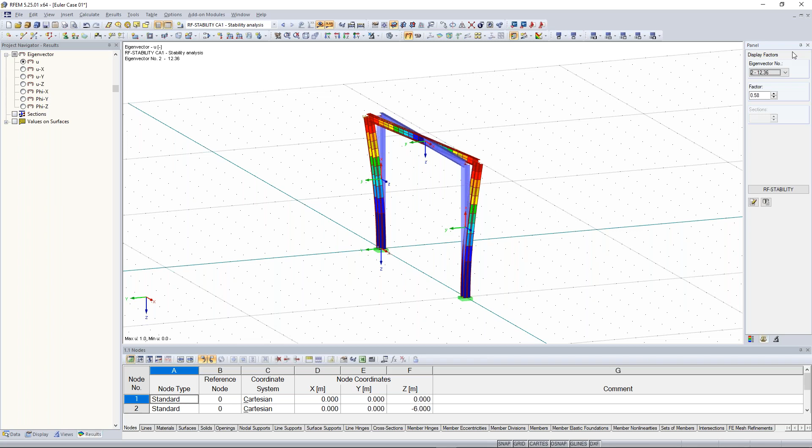The third eigenvector is that eigenform that we know maybe also when we have eigenforms in plane. And maybe also watch the other one -- this is also out of the plane. How can we prevent this failure out of the plane?

There are two possibilities. When I want to calculate it just 2D, I can assure that out of the plane, buckling out of the plane isn't possible. Then I just change here at the general data, right click, general data, the type of model to 2D, XZ. Let's do it. Calculate RF Stability again. And now let's watch the first eigenvalue, and this is this one. And when I switch to the other ones, only in the plane, and so on.

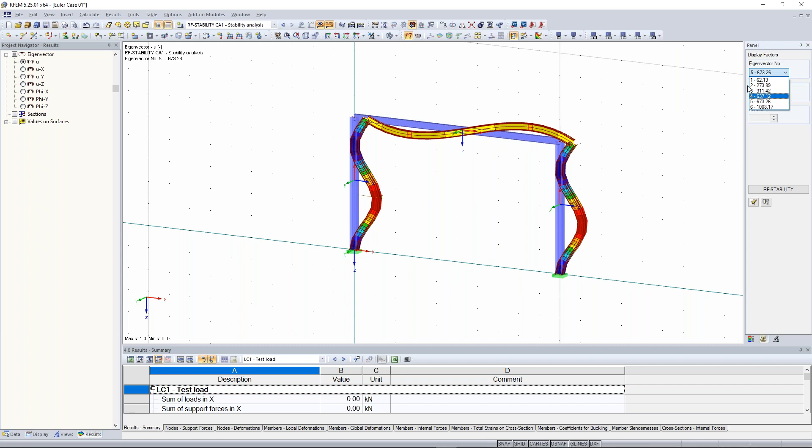So, but how can I prevent this when I have a 3D model? Because normally structures are in 3D. So, general data, 3D again. I can add here additional supports who carry loads from the global Y direction. So I select here the upper nodes, create here new nodal support, and now I want that this nodal support carries only forces in the global Y direction. Therefore, create new type of nodal support. I activate the deformation in this direction, and in this case it's uy. I click on OK, and let's see what's gonna happen if we have the same cases.

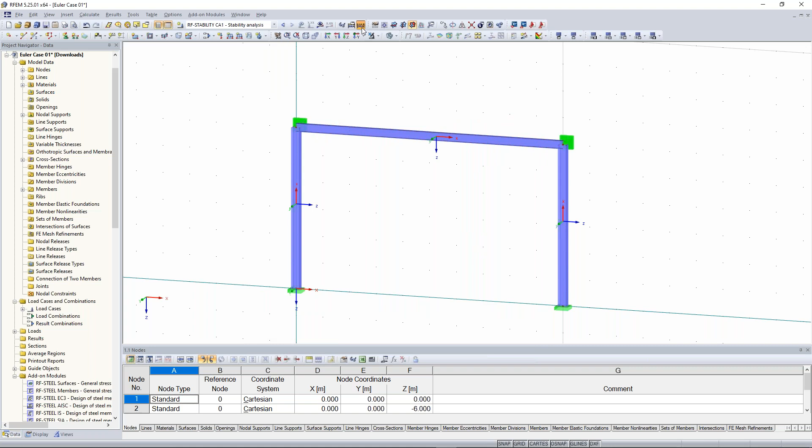Again, the first eigenvalue is here, this one. Next one is this one. This is out of the plane, but only the column, not the upper girder here. This is important to know. So this is more a local failure, and this is a global failure. This is important to know.

I've forgotten one thing. It's possible, when you take a look to the effective lengths, to use them also for stability analysis for this steel design, for example. When you calculate this by hand and compare the results, it can be possible that your effective length calculated by hand and the result by this program differentiate. This is because of the activation of the shear stiffnesses. So let's take a look at the results.

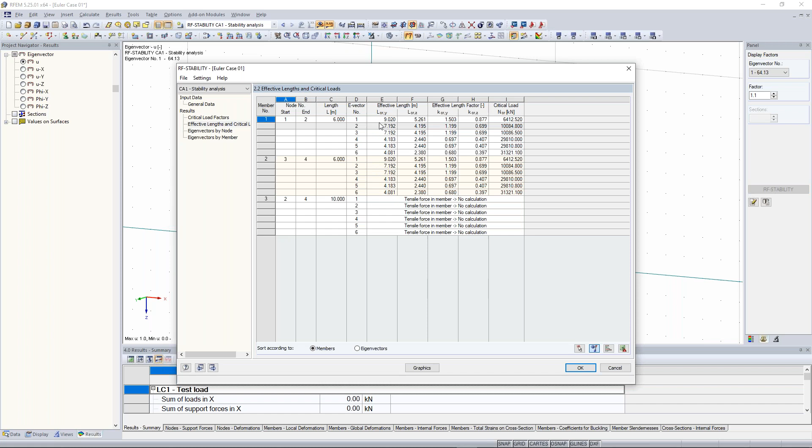Effective length, remember this one, 9 meters, 9.020. When we change the calculation parameters and deactivate the shear stiffness and calculate this again, and take a look at the results, we see different effective lengths. This is due to the shear stiffness. Keep that in mind when you want to compare your hand calculation with the results of the program.

So what does this mean? Effective length, L critical Y. First of all, effective length factor 1.5 — you have to multiply your member length with the effective length factor in order to get the effective length. So when you calculate 6 meters times 1.5, then you will get 9 meters. Nine meters is this member length here, so you have to imagine that this is the member length here, something like that.

I think this was everything. Bastian, are there any questions, or should I show something again?

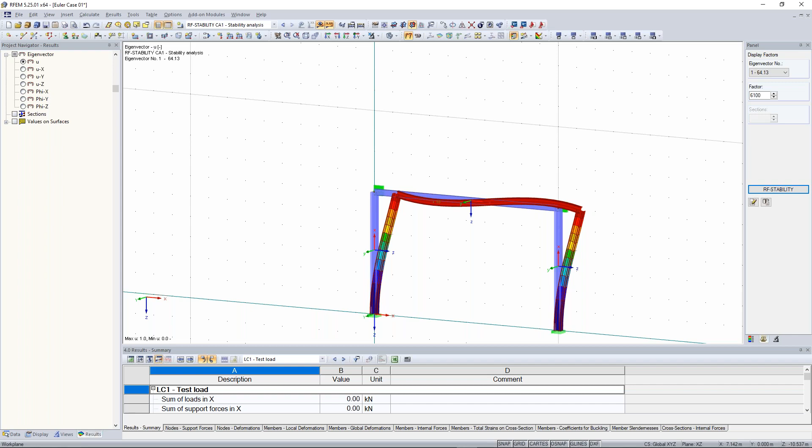There's no specific question, but maybe you want to show us how you can create a joint in the beam, or a joint connection between the column and the beam.

In general, when you use the beam type, every member has a member type, and this is the member type beam. This means that every member is connected to the other one rigidly — no hinges, stiff connections and stiff joints. When you want to add some hinges, like member hinge or also kind of springs, you can add a member hinge. Let's do that, so we suppose for the upper girder here at both ends a hinge. Hinge tells me that we don't want to transfer any bending moments to the other part, just shear and normal forces. So therefore I have to activate here Phi-y and Phi-z.

And the same also here for the member end, because every member and every line have one starting node and one ending node, and also the member direction. In this case, the member direction, according to the local X coordinate system, shows from left to the right side. So on the left side I have the starting node, and on the right side the end node. Therefore, I will get this member hinge on both ends.

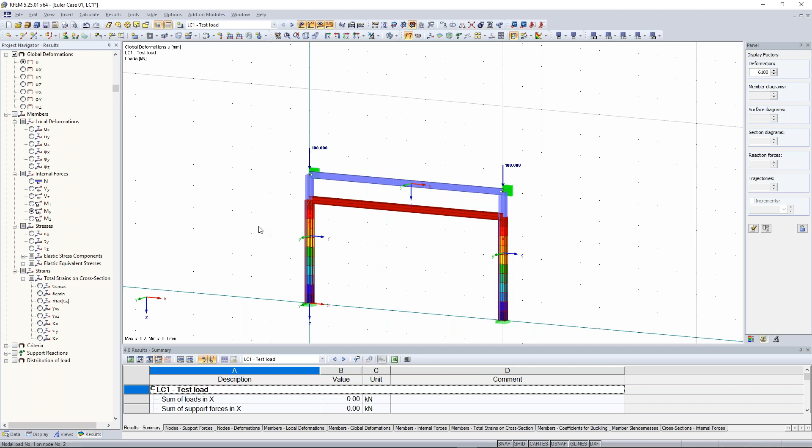You see here the deformation, I think that's pretty clear. And also the bending moment — at both ends I have no bending moments.

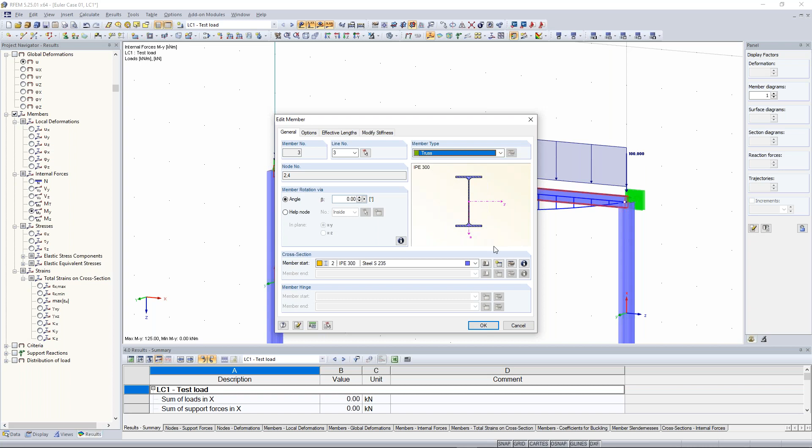And the same thing, when I have one beam which has member hinges on both ends, I can create, instead of this beam with both member hinges, another member type — this truss member type. We also offer other kinds of member types, but we'll come to those in other parts of the training. So I choose truss here. Truss means that I have hinges on both ends. I click OK, remember the 125 kilonewton meters, I click on calculate, and you will get the same result.

Good, Bastian, any other question? No, you just solved the last question by using this truss member, so no more questions. Okay.

Very nice. Now I have prepared the last question for you, Paul. Please answer me that.

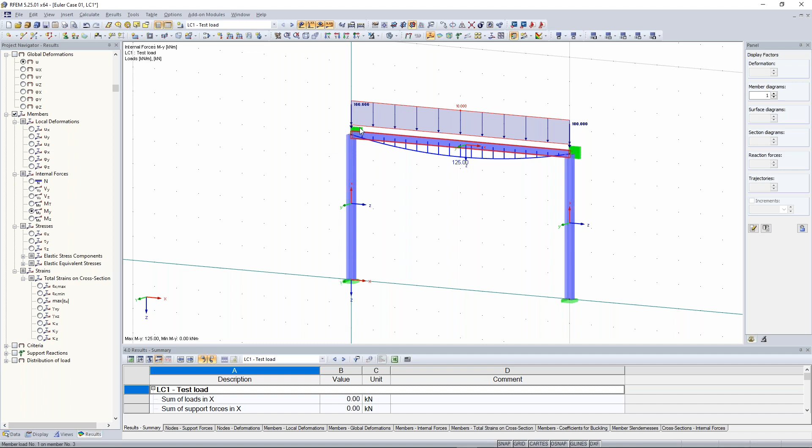I'm sorry for that, but what I wanted to ask is, let me show it to you here at RFEM. When I want to have a support node which has only horizontal forces, I have to activate Px and Ux, these two here. Sorry for that bad formulation of the question. But when I have something like this, then horizontal forces in X and Y direction are considered.

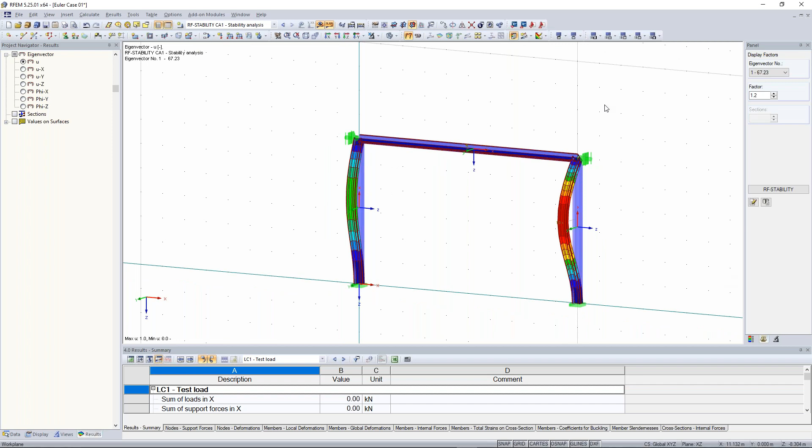Why do we need Vz for beam hinge in the previous example? First of all, the calculation of truss stability is almost the same, no differences, and so on, you can calculate this as well.

Now let's jump to the continuous plate. There was one question: why do we need Vz for beam hinge in the previous example? I think you mean this one, this nodal support. Oh come on, this one I can tell you why.

Because when we calculate this like that, then it would rotate, the beam would rotate over its own axis, so this would cause an instability. I can show it to you, and therefore we have to close this directional deformation. Otherwise it won't be possible to calculate it.

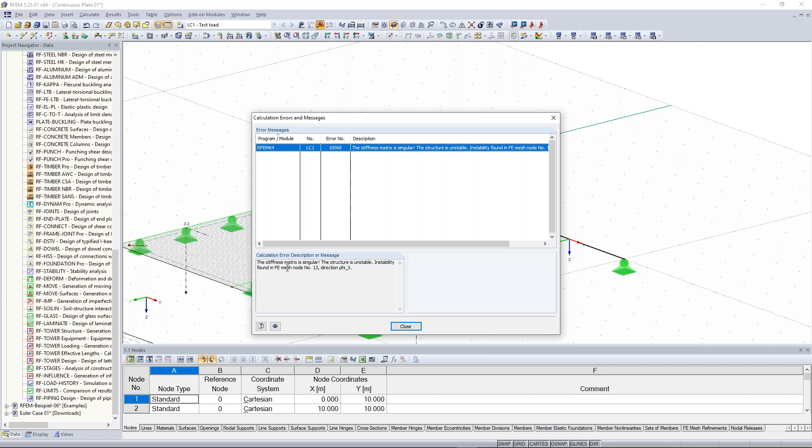Stiffness matrix is singular, instability found. Structure is unstable, instability found in FE mesh node No. 13, direction phi x. Therefore, we have to close this possibility of movement, and then it works.

Now the other question: can you model two-way slab in 3D and compare it to hand calculation? We will do this in the other parts of training. And yes, today's training or webinar was free for students. Exactly.

So Bastian, anything to add, or do you have something? You were too fast, because, yeah. Sorry Bastian. No, but I would say that we have everything. Do you? What do you think? Good, then I would say, have a nice day.